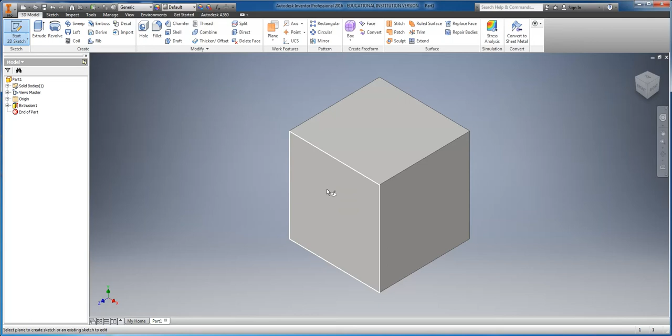To create a new sketch on this shape, we need to come up to the left-hand side of our ribbon and click on Start 2D Sketch. You can see this time it has a different cursor than the first time we created a new sketch, because we need to select the location we're going to undertake the sketch on. So let's select the front face of our cube, and it spins around so that we are looking at it in 2 dimensions.

I'll use my hand to pan down so I've centered the shape, and I now need to draw 2 eye sockets that are evenly spaced in the top portion of the cube.

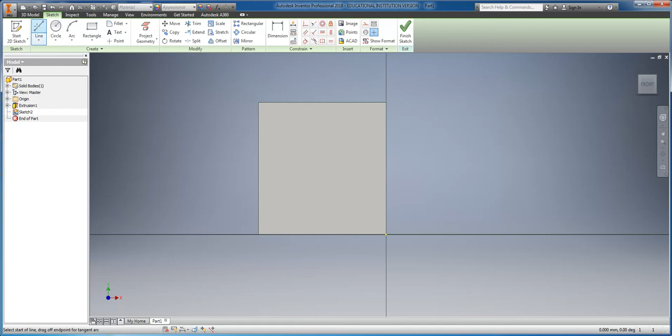To do that, I will start with a line tool for my basic setting out. I know this is a 20mm cube, so I want the center line, and I'm going to mark that at 10mm. I'm also going to put a vertical line in to ensure it's clear and obvious where that center is. Now that I've put those 2 lines in, to get rid of this daggy line here, I just hit escape.

Alright, so now we're ready to start locating our eyes. We want our eyes down at 5mm from the top, so I'll click on the center line and drag down, typing in 5mm, which gives me a point to start with. I also want my eyes centered in each half, meaning I need to draw a line horizontally across for 5mm to find the center of each section.

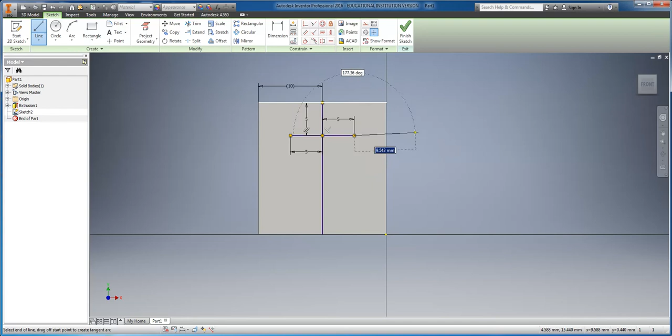That will be the bulk of my construction done. If I now hit escape again, you can see I've got the center marked for each of my eyes.

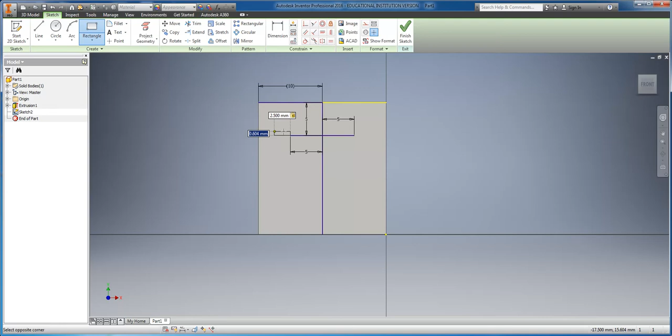To create my eyes, I am going to use the rectangle tool. I can then create 2 rectangles which are 2.5mm wide and 2.5mm tall. I'm now going to duplicate that by 2.5 and 2.5 to create the other half of my eye. We repeat those steps on the other side to create the right-hand eye, again 2.5 and 2.5.

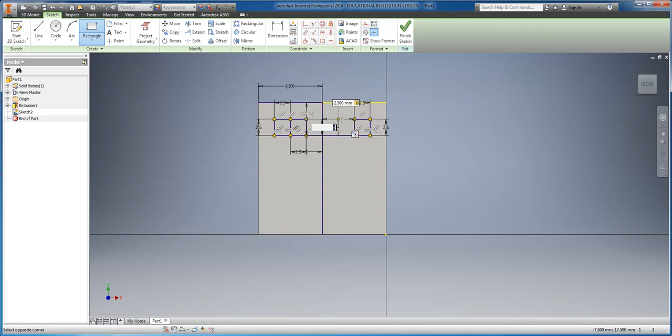Alright, now we've got all the line work in there, what we need to do is clean that up. So if we hit escape, we can come back and start deleting or trimming the unwanted lines. If you do not want any of the line, you can right click on it and select delete, and that will remove the whole line. We will do that for some of those working lines, and also for the dimensions that are there, as they're not important. So let's delete that line, delete that line, delete that line. One left in the bottom there, delete that one. And one last one there, I think.

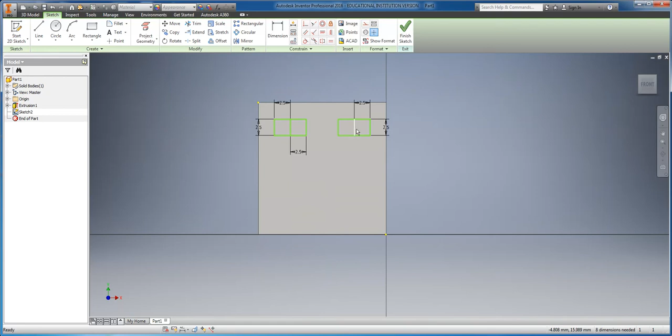There we go. So we're now left with our 2 eye locations and the shapes we want to extrude, except for a line in the middle here which we also want to get rid of. So we can right click and delete that line. We need to do that twice because there are 2 lines there.

In my next tutorial, I will finalize these extrusions.